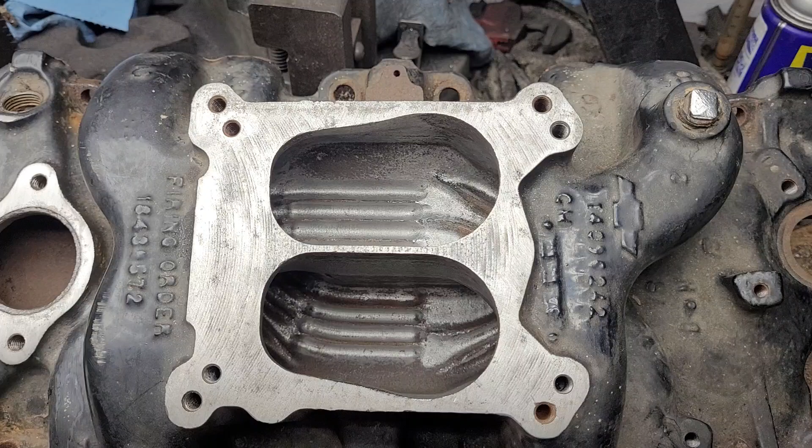Alright guys, we're going to do an update on the iron bow tie.

Now this was my first cut on this. You can see what I do to the top as far as reshaping it.

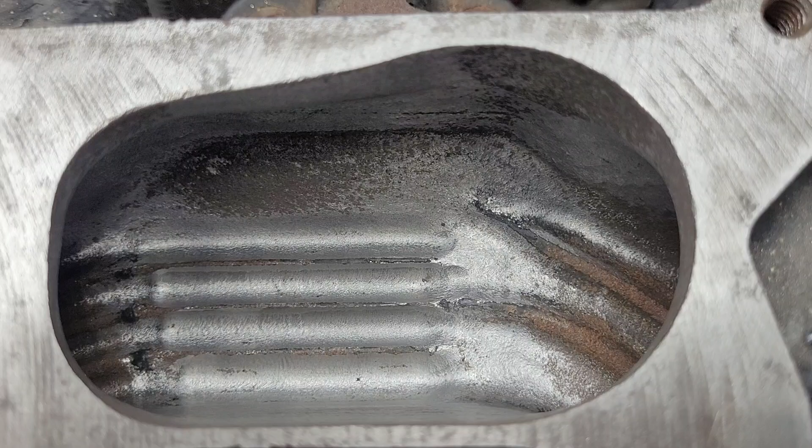Some of these got more of a radius than others depending upon what I saw and what I didn't see. I did do some work on the very floor. It's the way I want it.

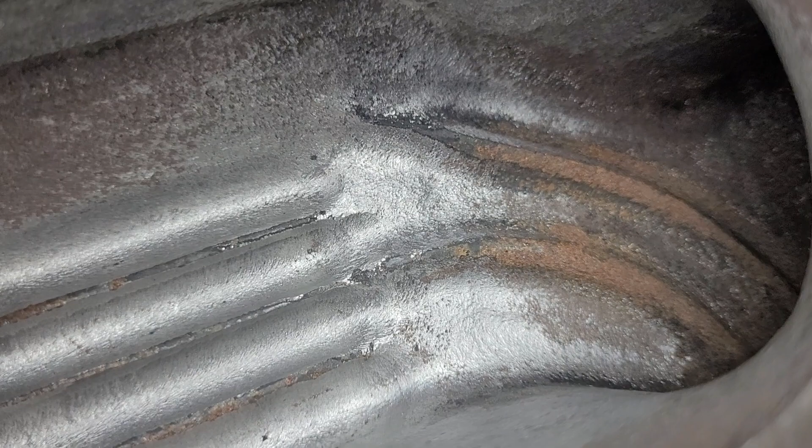I do leave the ribs in. What the ribs are designed to do is move any liquid fuel that falls out of suspension towards the leaner cylinder. Not that I think we're going to have that problem, but if this goes together, it's going to have a good sized carburetor on it, so I decided to leave them.

The other part that's interesting is 3,500 people have viewed this video. Well, actually the video before it, the first video with this. And nobody told me these wouldn't work with the Sportsman's, which I'm surprised at, because people love to tell me I'm wrong.

Well, that was my fault. I didn't realize it, but these actually come with a different angle on the center, so it's an 87 and up intake. So this will work out perfect when I finally get a set of TBI heads and work them up and get what I know I can get out of them. This will be a perfect match for them. So these may not go on the 331, but I guarantee it won't go to waste. It'll get used or sold.

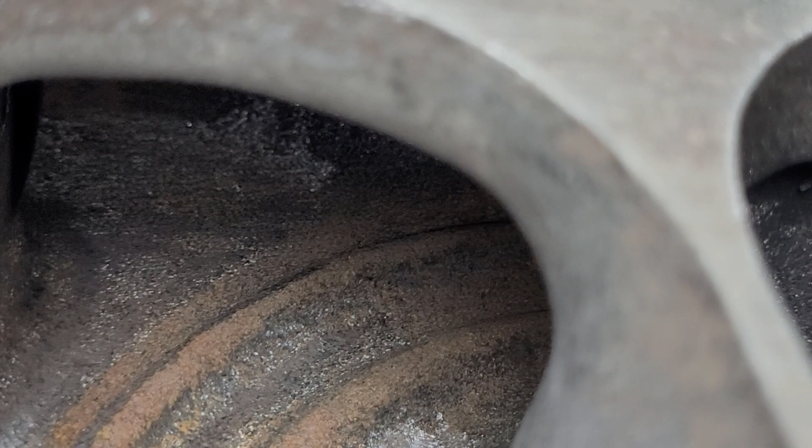Okay, you can see lumps and bumps and so forth have all been taken out of the plenum. Get what you can. Remember, it's a big intake, and it's a dual plane, so it's not possible to get everywhere. I mean, I can't anyway. Maybe if I got some 9-inch burrs, I could.

Get what you can, improve what you can. That top here only got a slight radius. I worked on the bottom radius as much as I could. They actually needed a lot of work. The floor actually needed a lot of work.

There was a lot of circular casting marks that I think they used to center the cores when they put the molds together. They don't really help, so they all got machined out.

Let's take a look at a couple of the runners. Okay, you can see I didn't go crazy resizing it because it's already a generous size. So you can still see the paste ooze line from the molds. That's what that casting line is. It's a paste ooze. When they glue the molds together, a little bit of glue squishes out and it gives you that line.

Okay, here's an interesting port. This is number 5. Take a look at that hunk of iron in the bottom of that port. Now, what is that for? That's for one of the carb studs. The Quadrajet intake has the same type of thing. But if you take a look at 5...

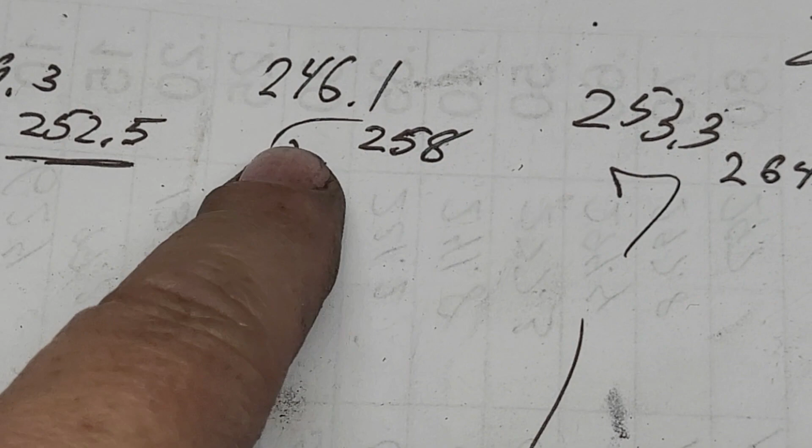I thought it flowed better than that, so my mistake. But we got a pretty decent increase on it versus the others.

Part of the purpose of porting an intake is to get as even a flow as you can out of it. That way you'll get an even charge in and out of each cylinder. She'll run a lot smoother.

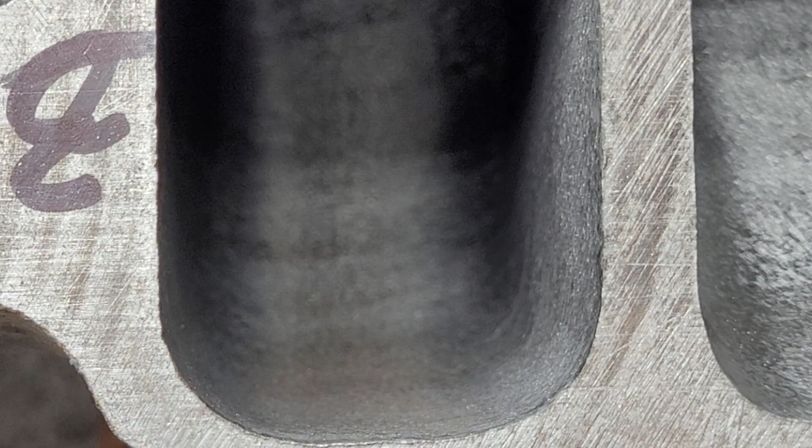Sorry about wifey doing the lawn. But as far as wifey doing the lawn, that's why you marry German, guys. If you don't do it, she will.

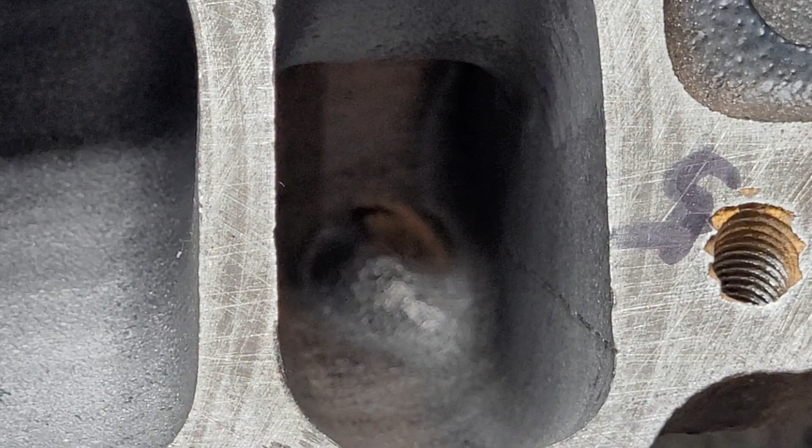Ah, it's beautiful. Now notice I didn't waste any time gasket matching this or anything because I don't know exactly what application I'm going to use it for. So that's something I won't do until it's ready to rock and roll. See how we did on the flow sheet.

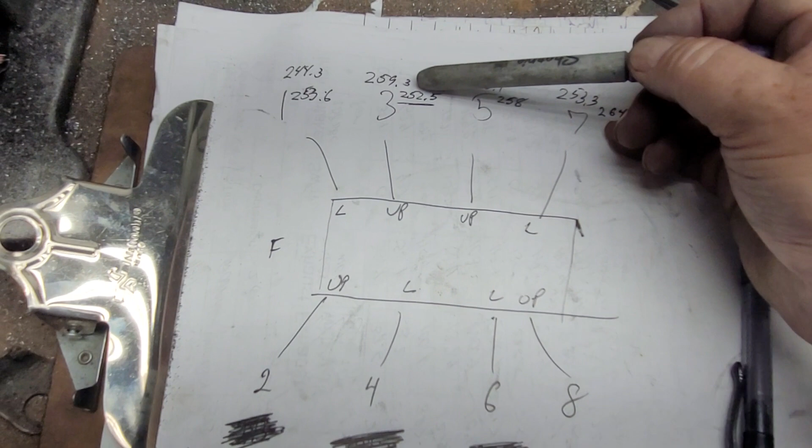Okay, number 1, we went from 244.3 to 253.6. Not as big a jump as I was really hoping for, not even 10. Number 3 was interesting. We went from 259.3, which was one of my better flowing ports, if not the best.

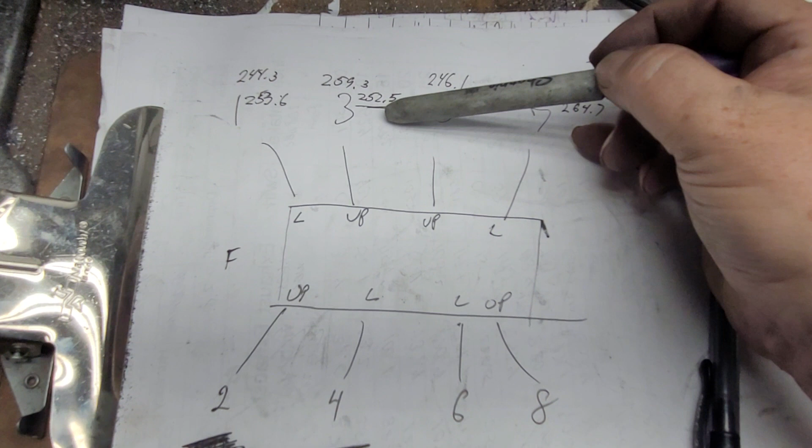It actually was the best flowing original port, and it got knocked down quite a bit. Then when I took a look at it, I saw a little anomaly on the ridge from the plenum transition to the runner that I think caused that. So, like I said, this is first cut.

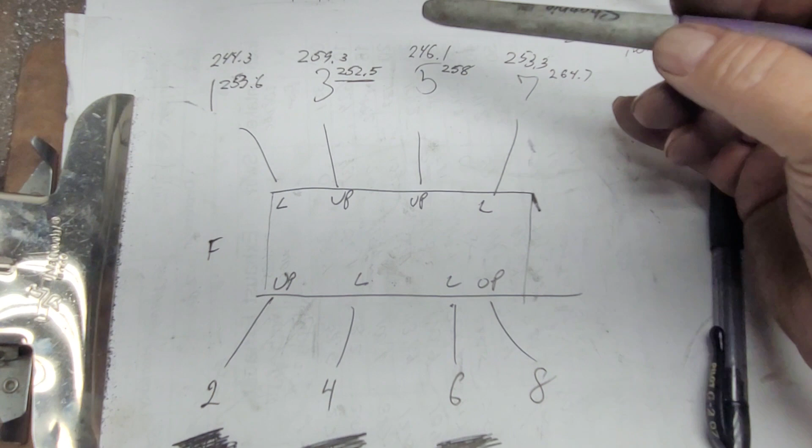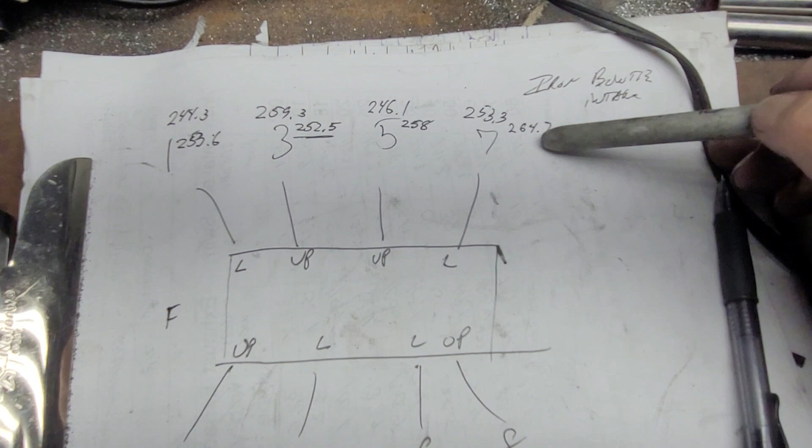We'll see if we can make that a little bit better. 5, we went from 246.1 to 258. That's a nice jump. Number 7 is 253.3 to 264.7, which is good.

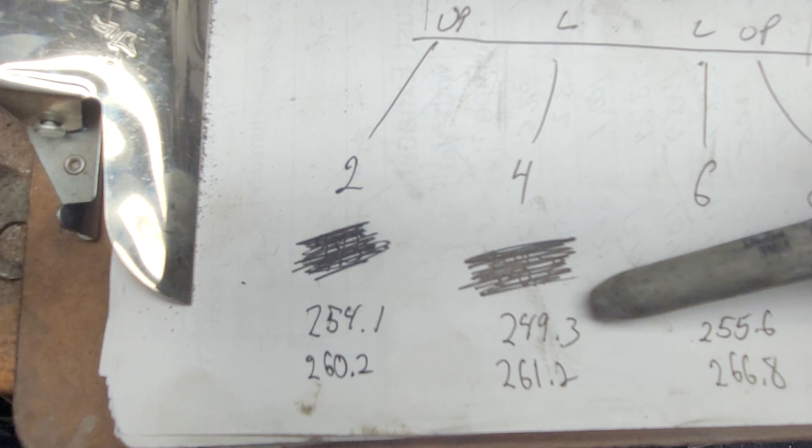2 is 254.1 to 260.2. 4 is 249.3 to 261.2. 6 is 255.6 to 266.8. And 8 is 243.1 to 257.

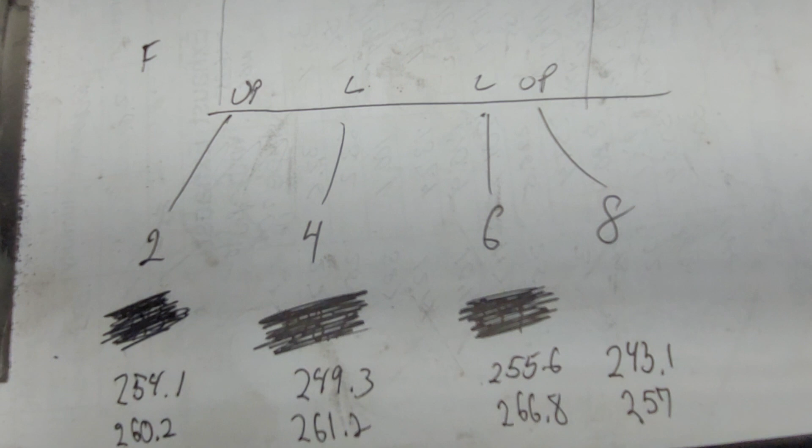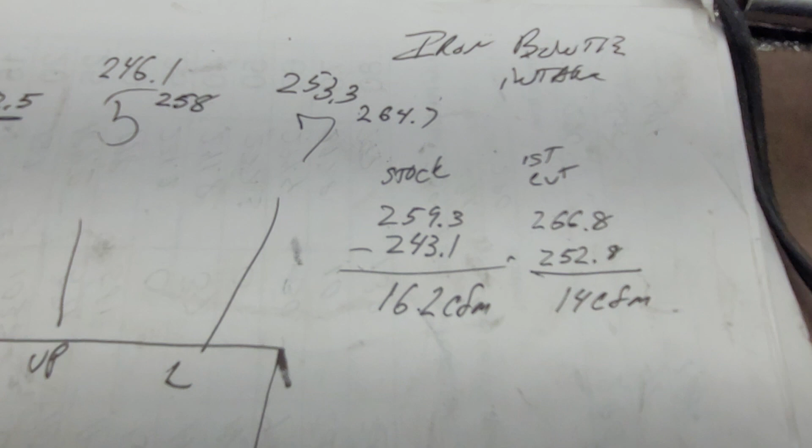I'm going to do a little quick math, and we'll see if we got closer or more separated as far as flow per runner. Okay, some simple math, right? First, stock, lowest and highest flowing runner, subtract them, we get 16.2 CFM.

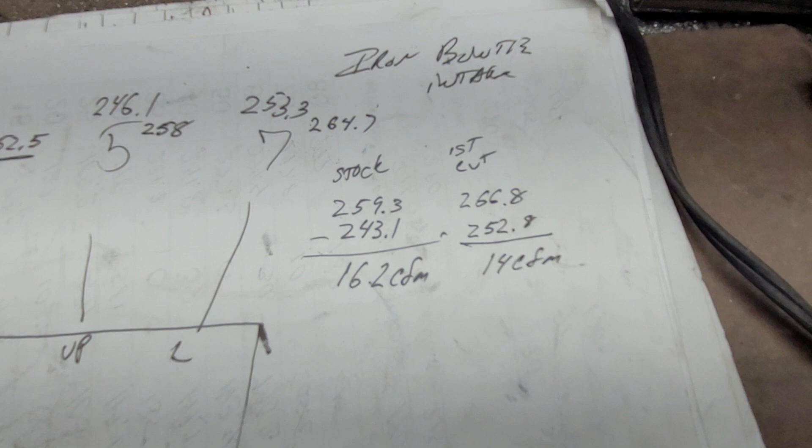First cut, highest flowing runner, lowest flowing runner, 14 CFM. It is kind of interesting which runners changed. Get out so you guys can see all the numbers. You can calculate that up if you want, but it'll be interesting where the flow changed according to the plenum cuts and the porting.